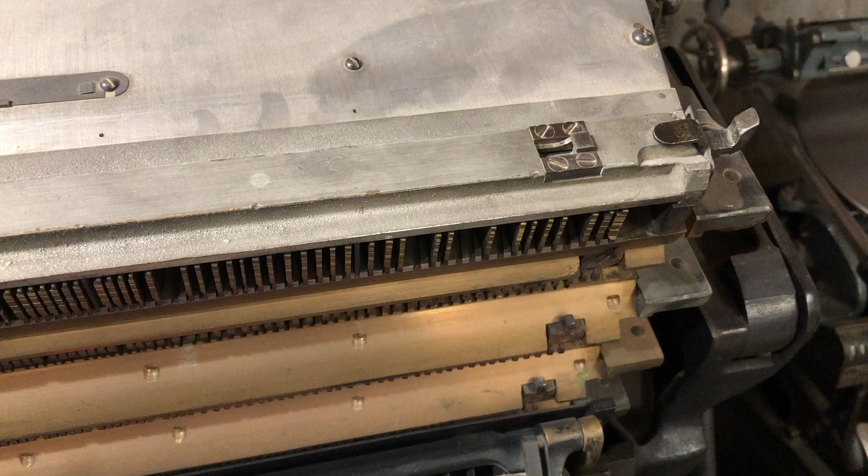So this is a bit of video I recorded a couple months ago. What you're about to see was just a quick little thing I did, stuffing some springs inside the verge rack escapement mechanism of a Linotype magazine frame.

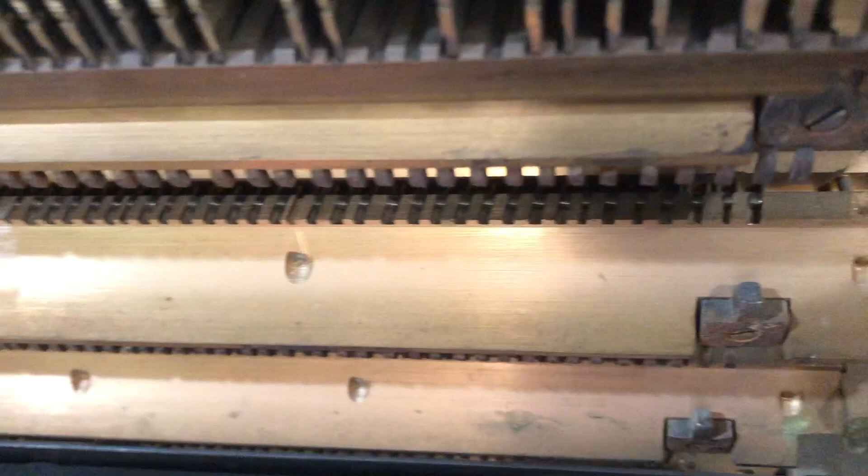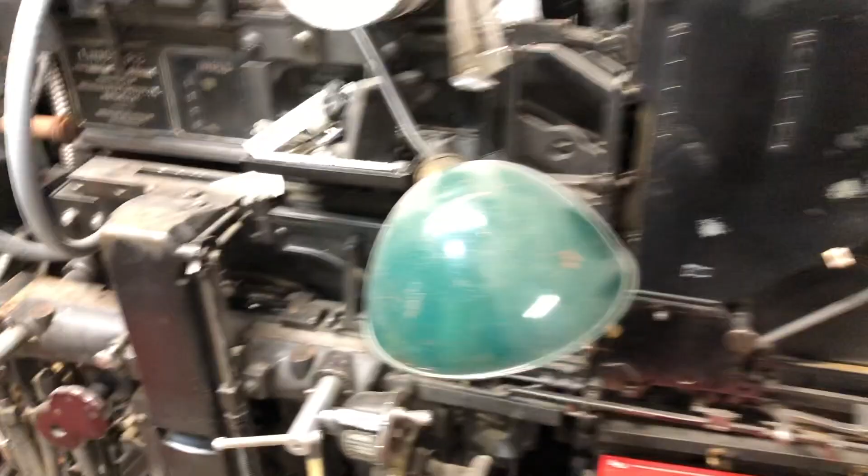One of these things, but for the Model 8. Anyway, I thought it'd be interesting to give a little overview of what the escapements are in a Linotype. So this is my Model 31 Linotype, and I have the magazine unlocked.

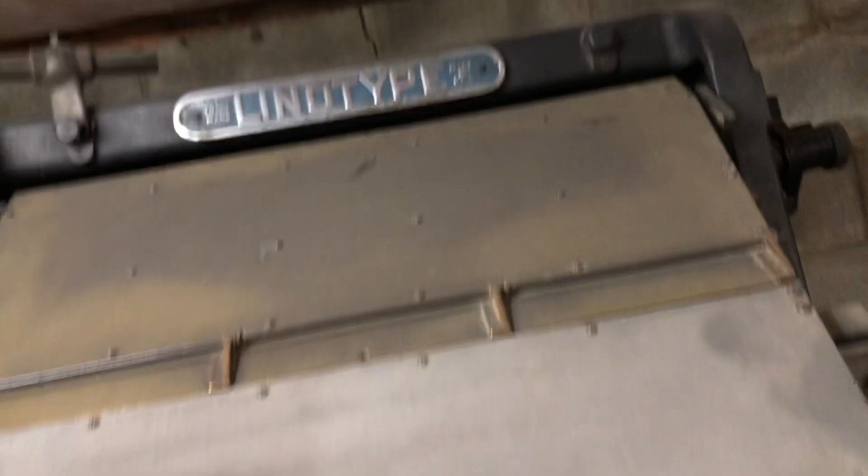So this is a little lever that can—on older magazines they call it a sword, and it was a bar you had to stuff in the end that locks the mats from falling out. So here's the mats. This is a Linotype magazine, actually a half magazine, so this is for small fonts.

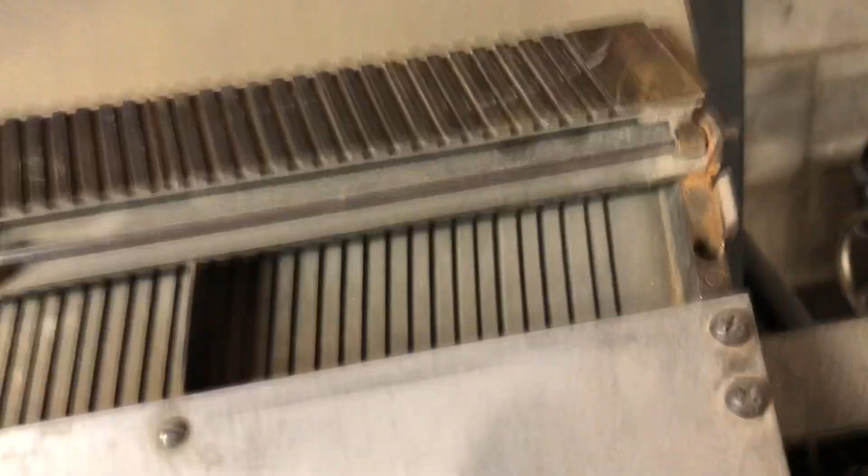So if you could see inside a magazine, that's what you would see. Those grooves are what the mats run in. And even though this is a half magazine, the mats from the distributor get dropped in way up there, and they still have to slide all the way down to the half magazine. So there's the half magazine.

Whereas what you see over there, some junk sitting in front of them, those are full magazines. Anyway, where was I?

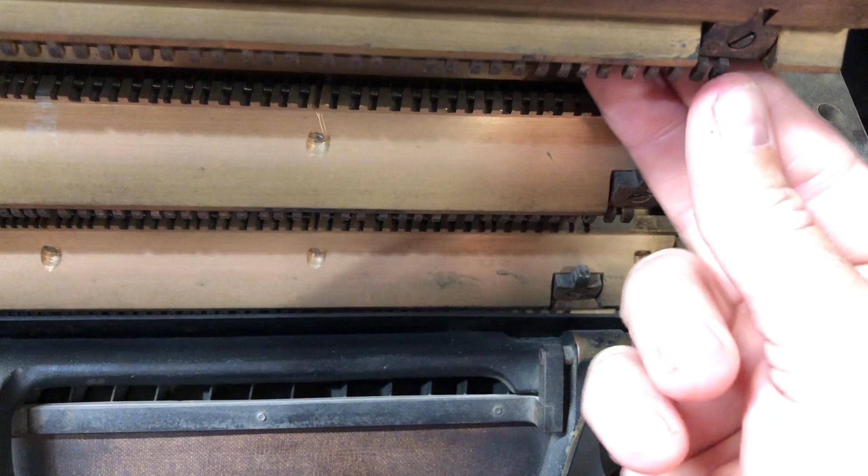Right, so when you press a key on the keyboard down here, through a bunch of magic, it pushes on a rod that ultimately pushes on this little plunger here. It's called—well, we'll see what it's called when I get to the vocabulary. When we push on that, I'm just going to make sure I do this right. Whoop, we get a single mat. It's like a mat vending machine.

That would be a letter or something. Now we can push it again. Oh, that was all that was in there. They're fairly common mats. Anyway, that is what's known as the escapement mechanism on a Linotype, and that's one of the mechanisms that makes it work.

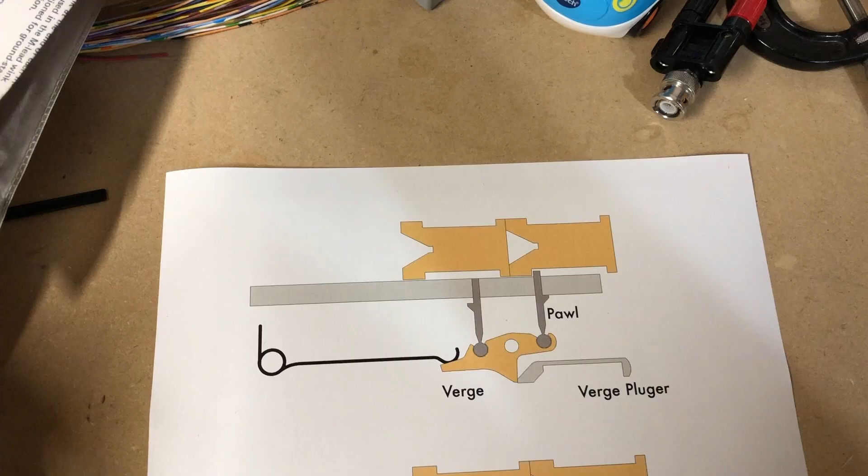And I'll give you a little overview of how that works. But first I'm going to shut the camera off and run these back into the magazine backwards, back through the escapement, which is not the way it's meant to be done. Alright, shoved the mats back in the magazine.

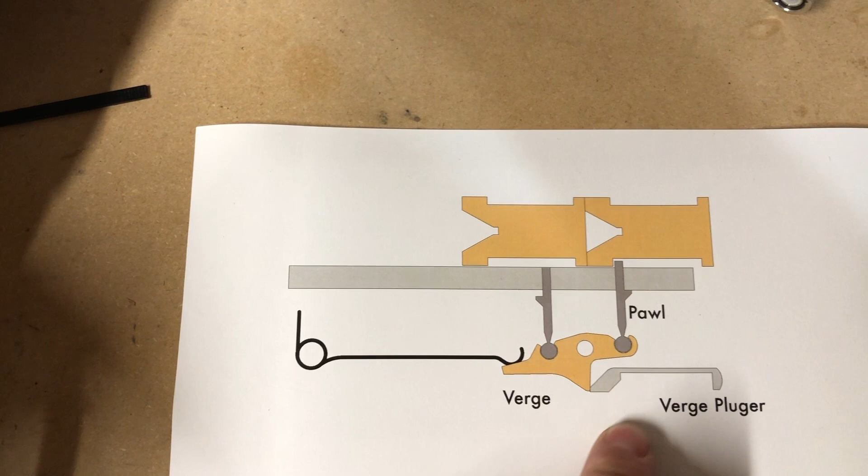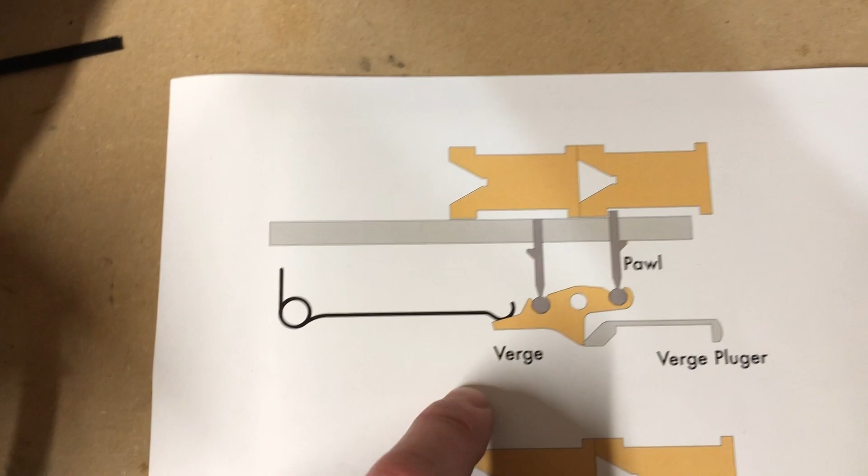So I created a little illustration here because I couldn't be bothered to figure out how to create an animation. Sometimes you just don't want to learn a whole new piece of software just for something quick. And this is a cross-section of what we were just looking at. See, there's a mat. I traced over the parts in a scan of a Linotype parts catalog to figure out these shapes, and then just kind of scaled them until they fit. It's all very approximate. But anyway, so at rest, here's the springs that you'll see shortly.

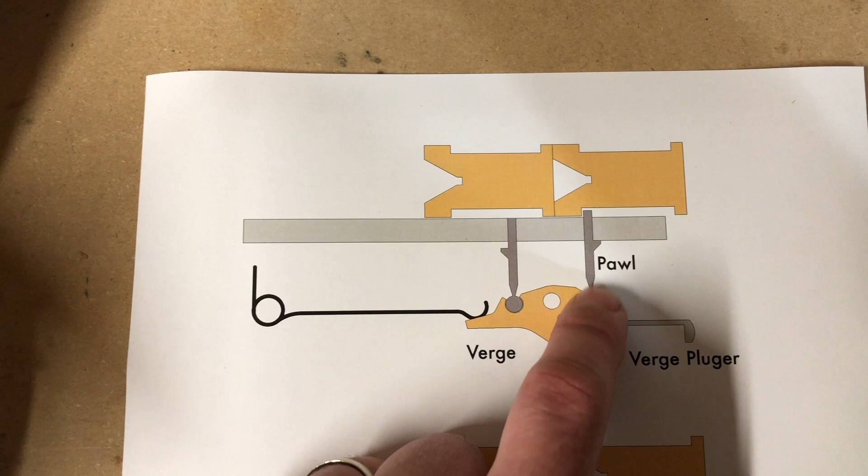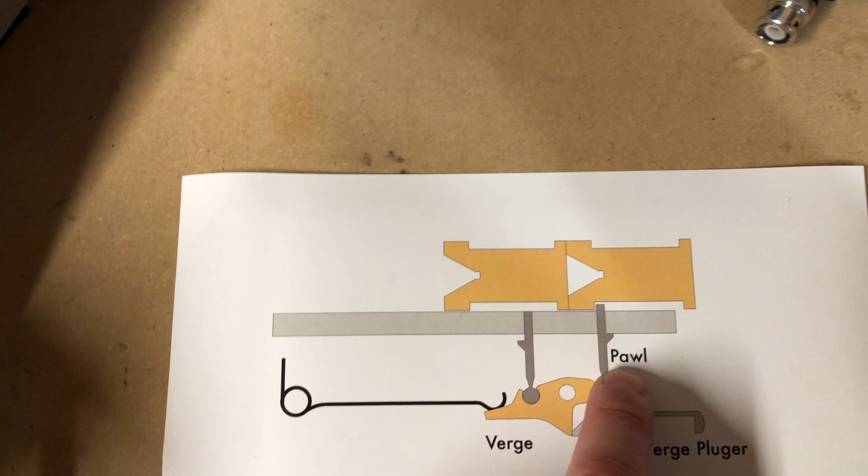These are the—well, let's go over the terms. This is the verge, this little brass thing. That's a pivot that it pivots on. There's a rod that runs the length of the magazine frame. And then these pawls, they move up and down, they rock on that pivot point there. And then this verge plunger is what you see sticking out right there. So those are the verge plungers.

You can just see—let's see if I can find where my finger is. Nope. You can just see the pawls moving. So you can see them going up.

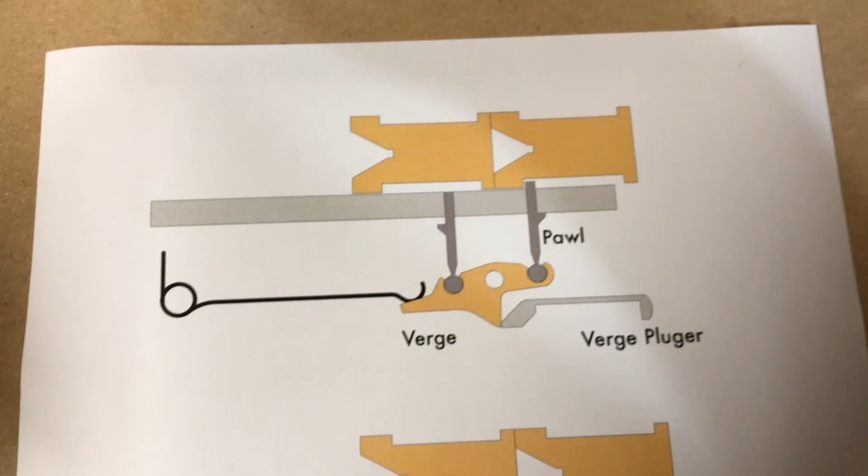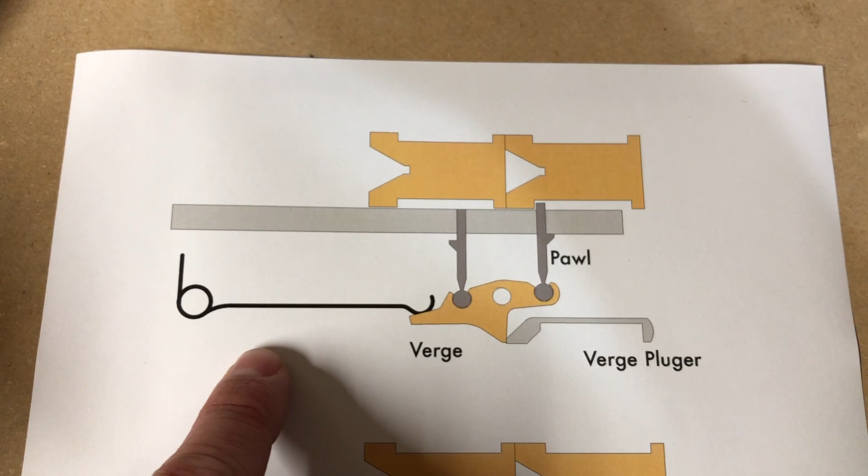So in the video you're about to see, which I recorded before this, I was a bit confused on the terminology. And the reason I was confused is because none of these things are the escapement—the assembly is the escapement, but the verge and pawl and the verge plunger are the pieces in a spring. So when you push a key on the keyboard, the escapement gets pushed on. The verge plunger is pushed.

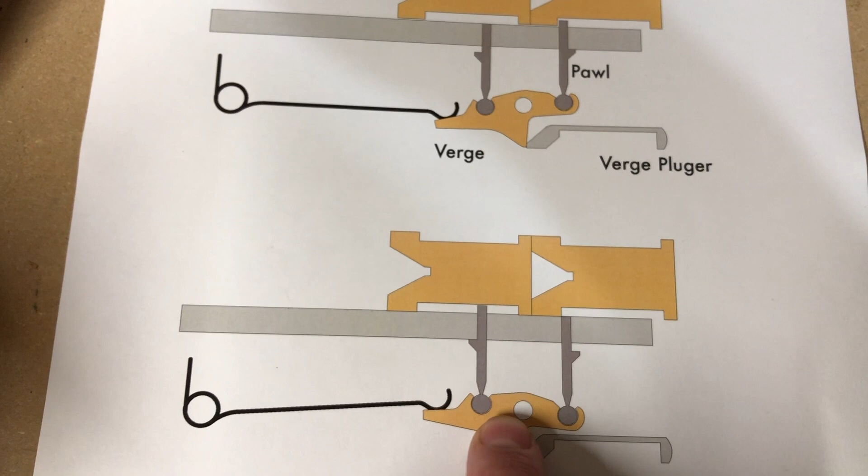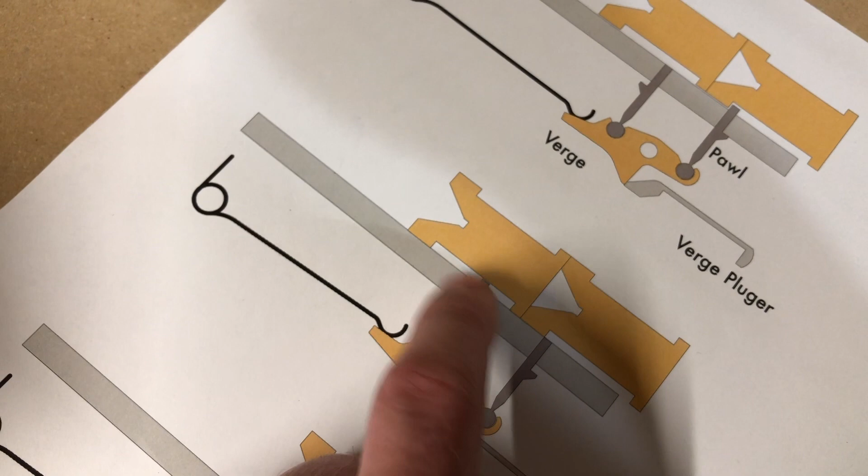You can see that's got a little bit of rock now, and that drops that pawl, lifts that pawl. This is all at an angle in reality, and so that frees this mat, and traps that one. So then we get to here where that mat falls out of the magazine, and this one is trapped.

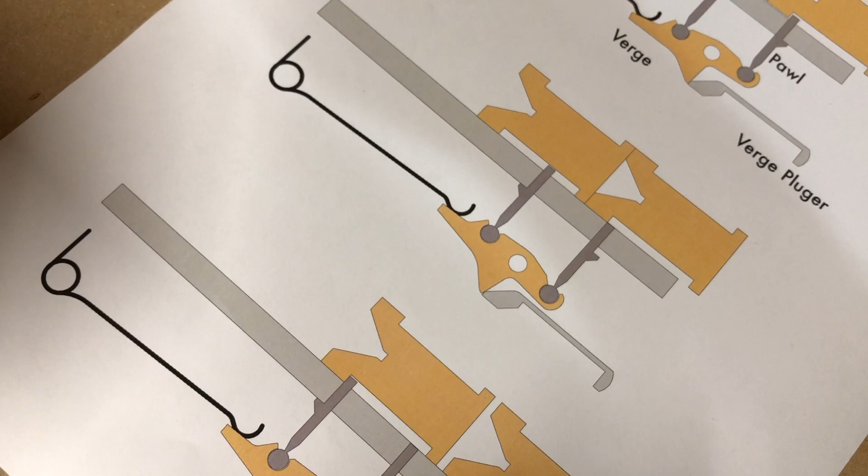And then when these switch positions, which I didn't draw, but you'll have to just imagine it. When these switch, then we come back to here. Is that right? Yeah, so this one drops, that one goes up, the whole thing slides down, and we're back to this state.

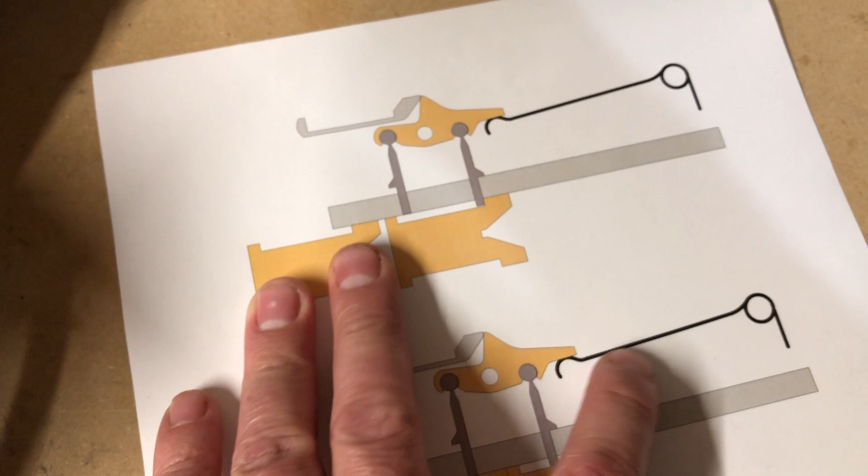So what you're seeing in the upcoming video is upside down, and even the pawls, or the plungers, are hidden. All you can really see is a bit of the plunger, this part of the verge, and the spring, and that's about it.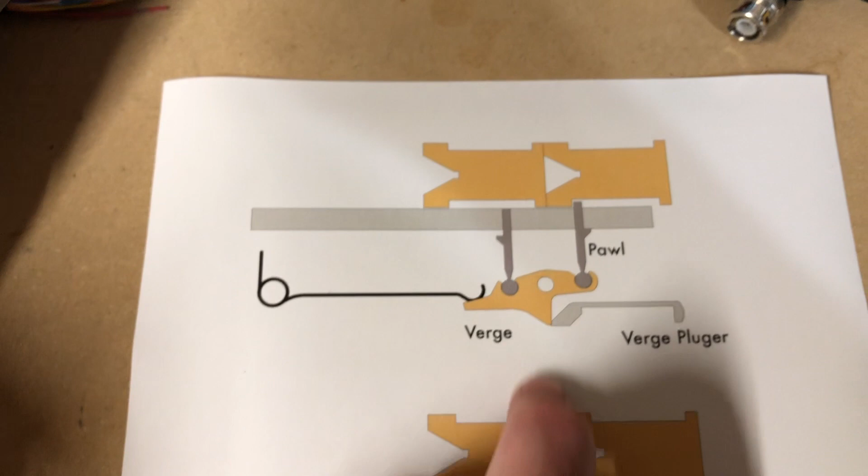Anyway, it's a little overview of how that works. I've always kind of just been curious about the geometry of this, and so this is a fairly accurate representation of the geometry, if you're curious. There it is. And on to the video.

I thought I'd bring you in to join in the fun of replacing escapement springs.

Stop that from happening. So this is the escapement out of a Model 8 Linotype, the escapement, I don't know what the actual word is. Anyway, all the springs are missing, or most of them. There's some over here, about that much. But I did pick up some Model 31 magazine frames.

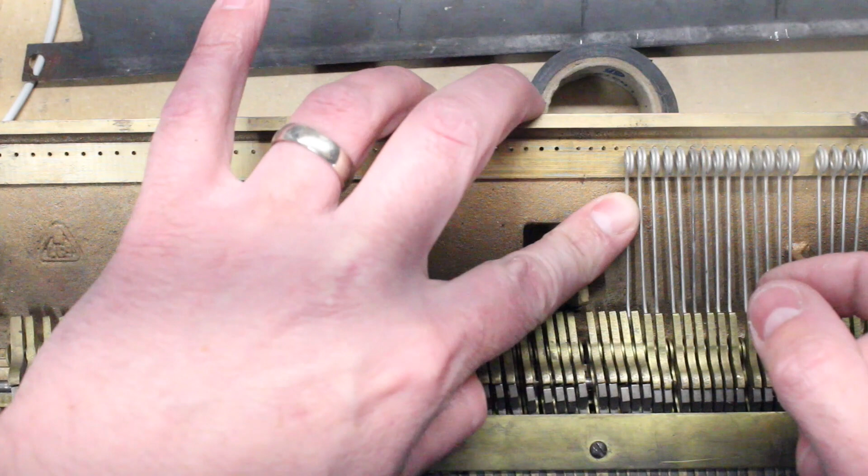Luckily the springs didn't change, so the Model 31 springs work just fine in this Model 8 escapement rack. It's actually really easy to replace. There's a small V-notch in the bottom of these things, so once they're in, they don't pop out.

But they need to be covered. If they're not covered, they get bumped, and then they start to come out really easy. Oop, there we go. And all I have to do is poke it in there, push it down, and catch that edge.

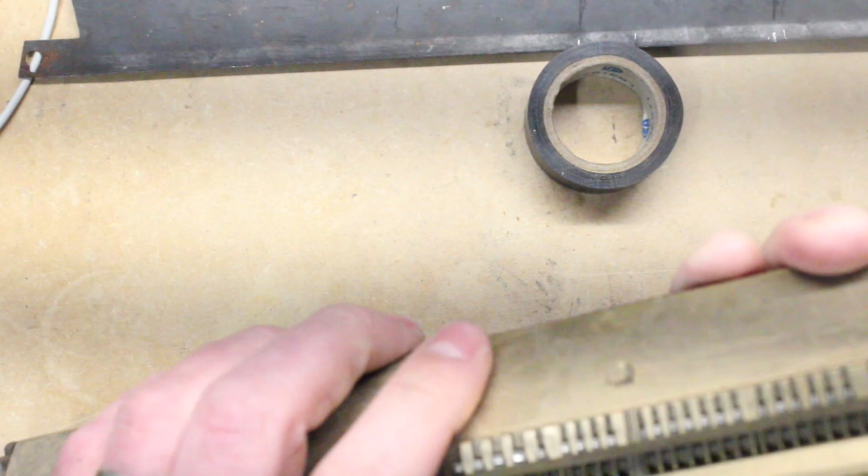So if I flip this over, you can see where right here, this is where these are the escapements. So when they're pushed on, one side goes down, the other goes up, which lets one mat through.

I wonder what that number matches. I will check in a minute. Oh, shoot. That's what I get for touching it.

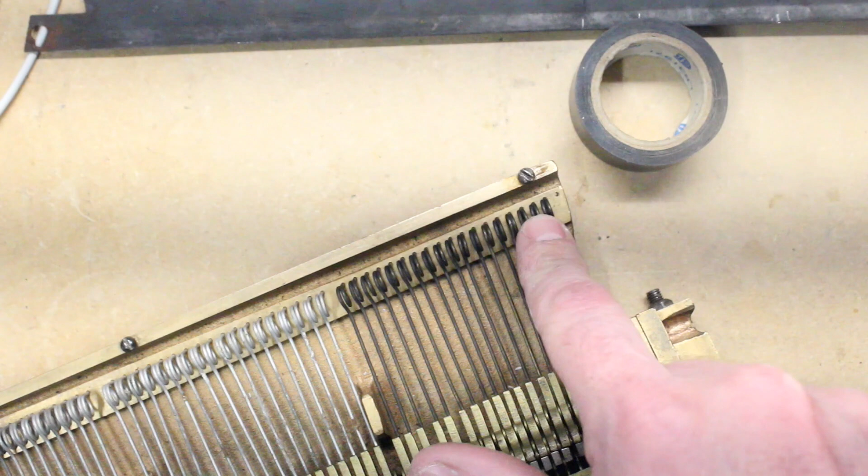So on the far side here, you can't see me fiddling there. I'll do this. That's all that was remaining of the originals. So those are the 99-year-old springs. And then these would have been from, I think it was a 1950-something machine.

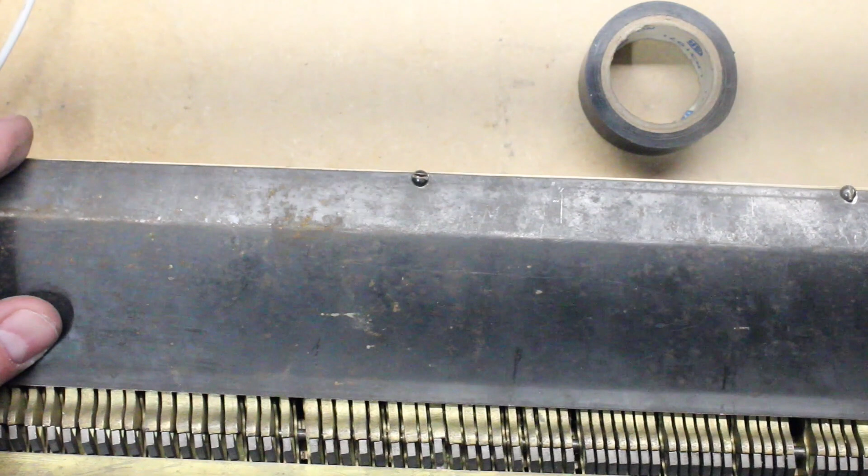So the cover drops on and stops those things from getting knocked out again. And littered from here to Alberta, I'm sure. No, from here to Seattle.

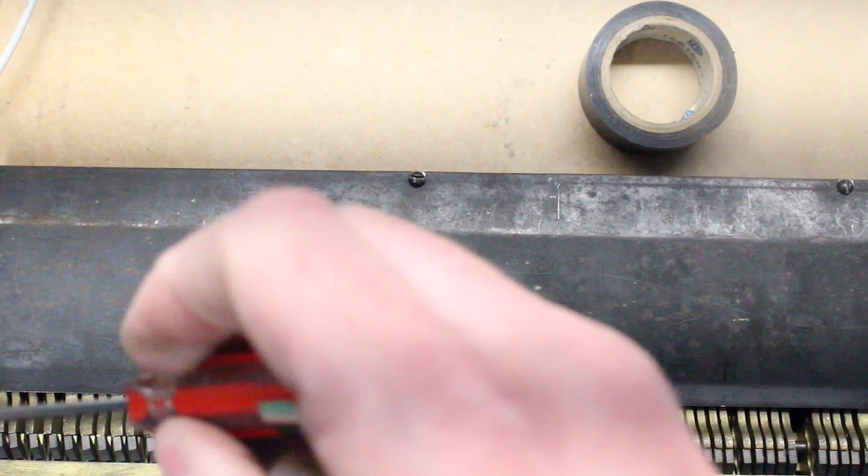That one's really quite sticky. Oh, because this one's bent. I'm sure a hammer will fix that. I don't think those are compatible. Well, they might be.

Alright, there it is. That's how to install the springs. Is it a verge rack? Is that what this is? I can't remember.